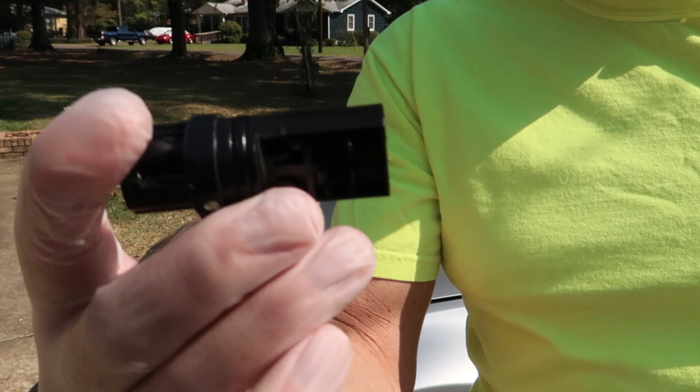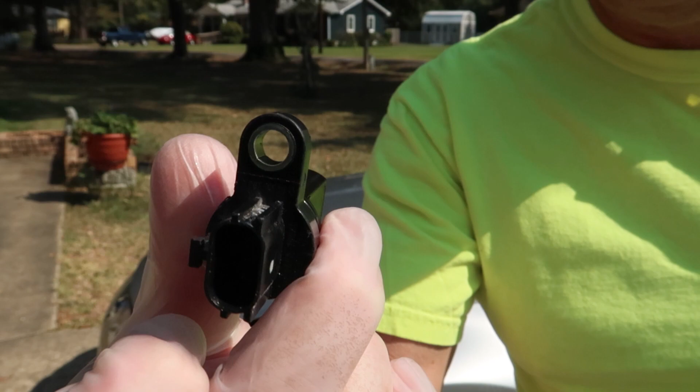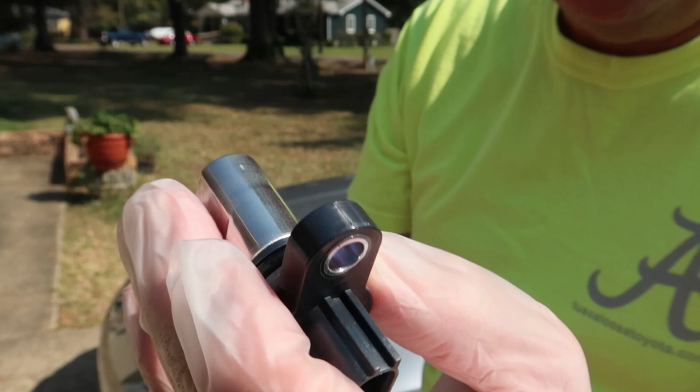It's plastic, rectangular shaped here, and it did last 15 years, so I'm pretty happy about that. No problems with this thing until this year, and now it's finally failed. And this is the new version that Nissan's come out with, and it's now made of metal. They spent a little more time and money designing this, and it's a little bit shorter, but it still has the exact same harness plug, so it's plug and play. So I decided finally to go with this one.

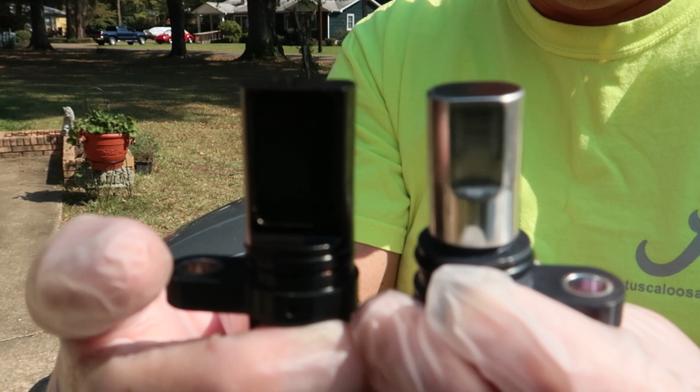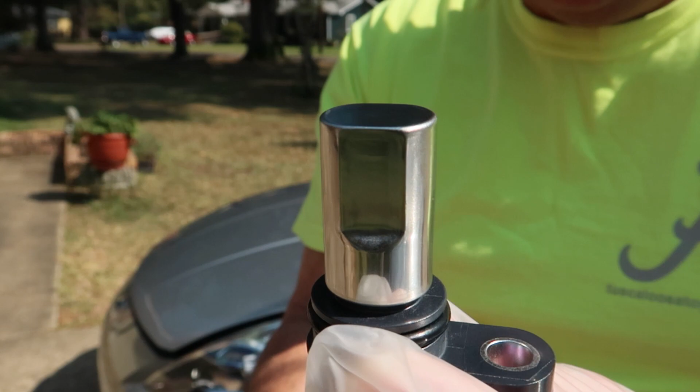It's much more expensive. It's 161 bucks versus paying like 35, 50, 75 bucks on some of these aftermarket sensors, but they're designed to last as long as the original. And these aftermarket versions, I've heard of them failing within a year of replacing them, or a few months, and people will have to go and get a new sensor even though it's under warranty. They're replacing them all the time.

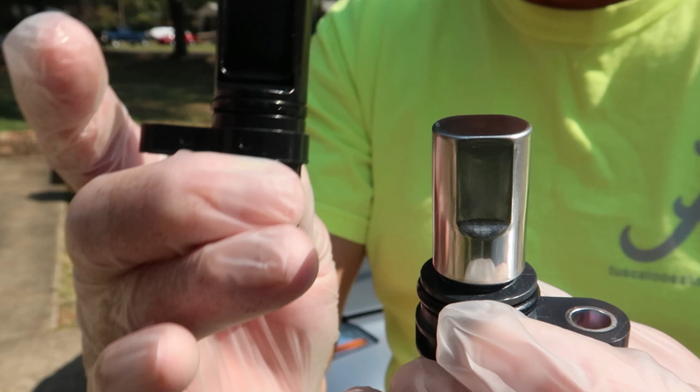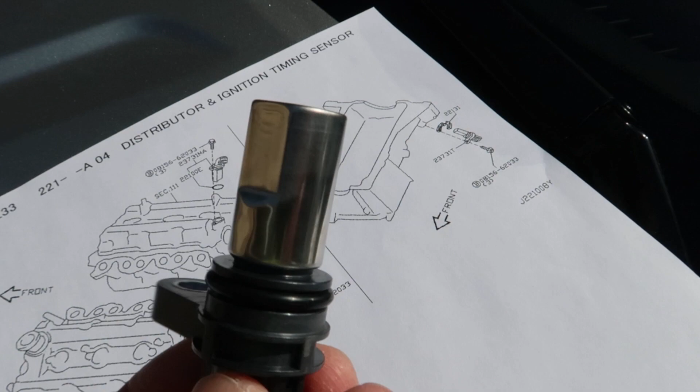I just don't think it's worth the time and effort to keep replacing an aftermarket sensor, and I would just stay with a Nissan, because these VQ engines are very sensitive when it comes to these camshaft position sensors. You really want to run a Japanese sensor in a Japanese engine, you know what I mean? So stay away from those aftermarket ones, but if you can't afford it, then you can give them a try.

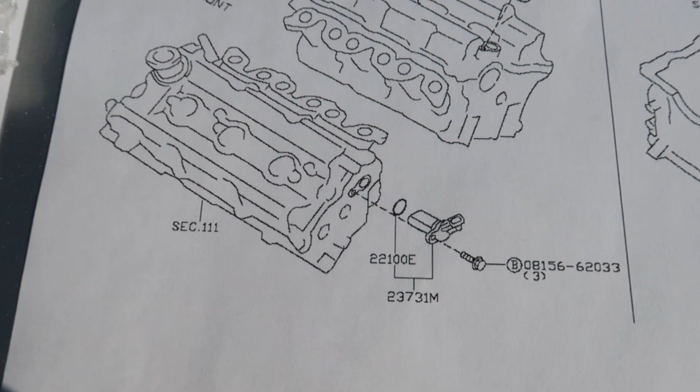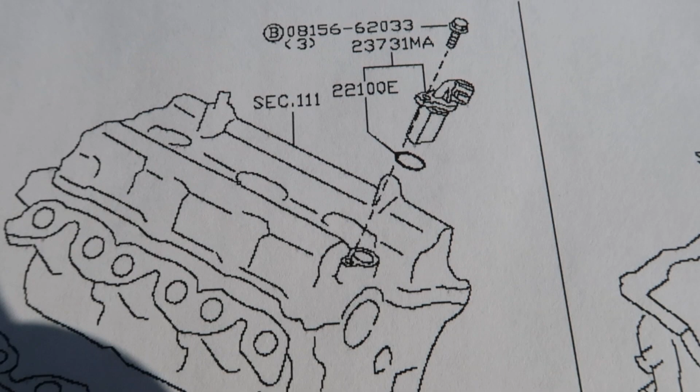Now, this is a little diagram that Nissan gave me. Just wanted to show you kind of the position of the sensors, and this is the side we'll be replacing, but here is the harder sensor to replace. This is the driver's side, and it's underneath the plenum, pretty hard to get to. You may have to remove part of your intake to get in there and visualize it, but we really won't be looking at that one today. We'll be going over the passenger side, and it doesn't slip in from the top as this diagram shows, but it kind of comes down right here in this area.

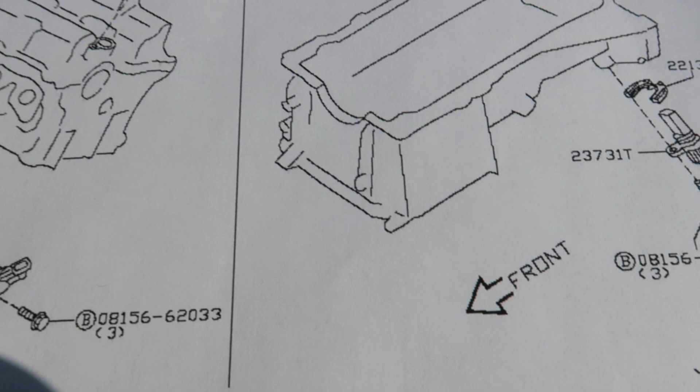Now let's go over some of the signs and symptoms that you're going to run into that'll give you a clue that it might be your camshaft position sensor. First thing is that it doesn't matter if it's automatic like this one or manual, you're still going to get these same lights going off. You got your slip, your traction control, and your service engine soon light will all three go off.

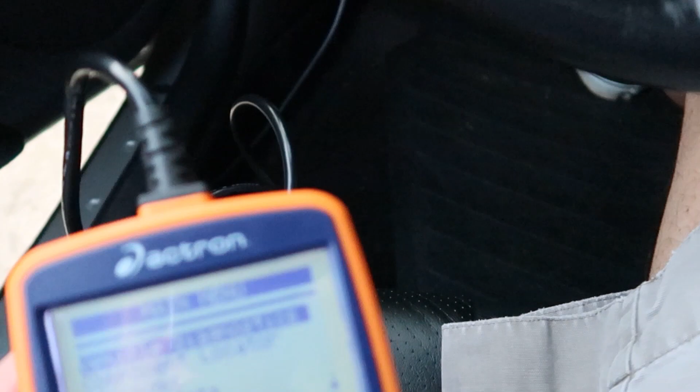We do need to figure out which sensor it is, of course, and that's where you're going to need a code reader, and I happen to have one, so I'm going to go ahead and plug that in here and see if we can determine what sensor's out, if not both. So the port is right here. It's easy to get to. I have an Actron code reader, but if you don't have one, you can go down to AutoZone, and they can also read it for free and tell you which sensor is burned out or if both are. So that's a little tip for you right there.

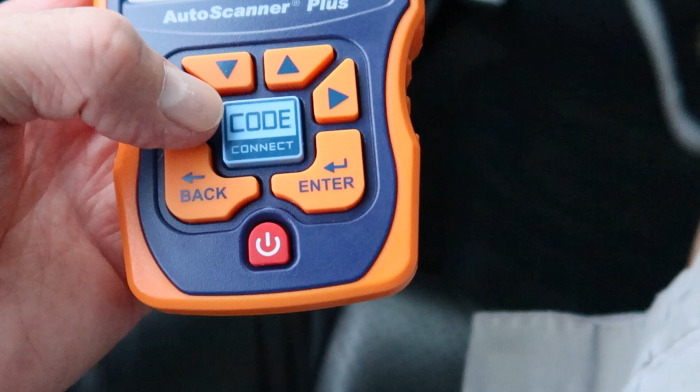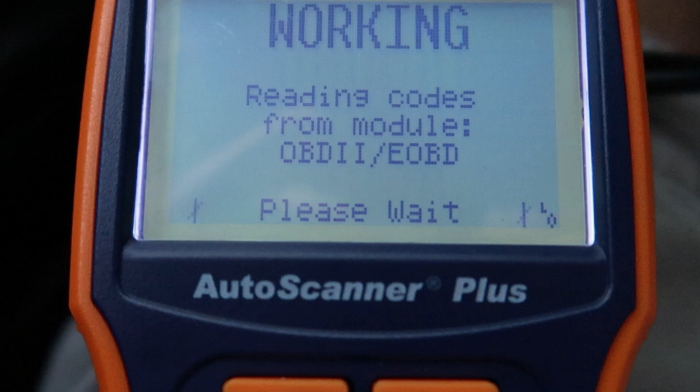Now we've got the scanner all hooked up, we can just run through the prompts. It'll pretty much tell you what to do, and all we have to do is sit back and wait and let it read all of the codes that have popped up, and then we'll kind of evaluate from there. There we go, done deal. Now we can just pan down and see what we've got here.

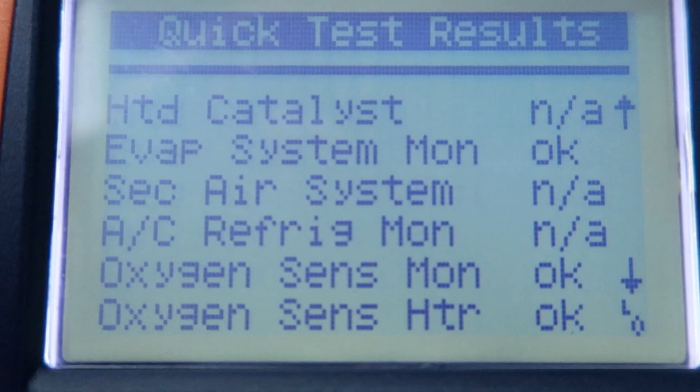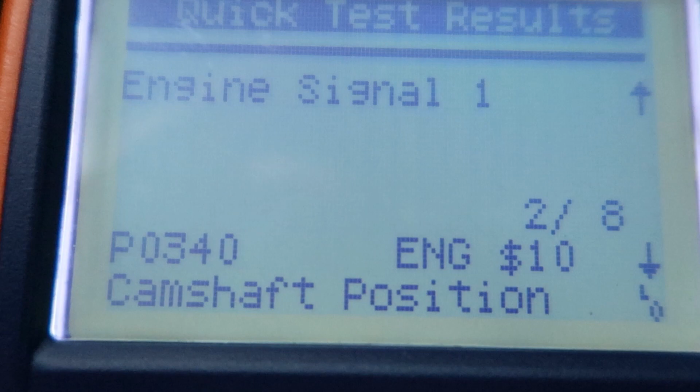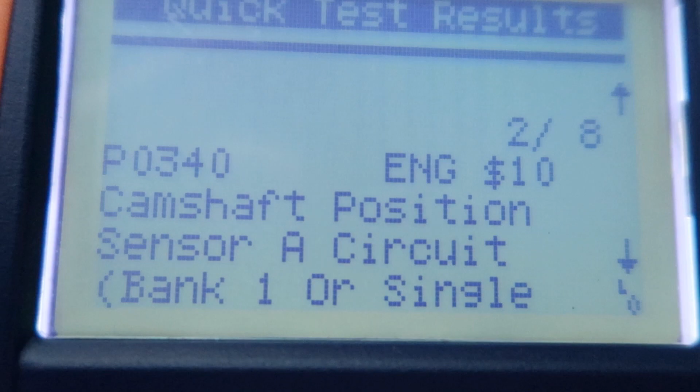So right now it looks like we've got, there it is, read codes 1130 engine signal 1, which I'm not real sure exactly what that means. I could look that up, but I'm going to just keep panning down. Here's a 0340 camshaft position sensor A, bank 1, like we thought we might have had a problem with that one. So boom, there it is. That's pretty straightforward. And then we're going to keep panning down.

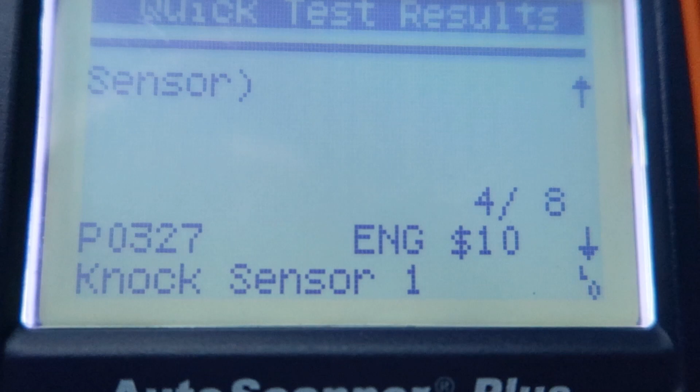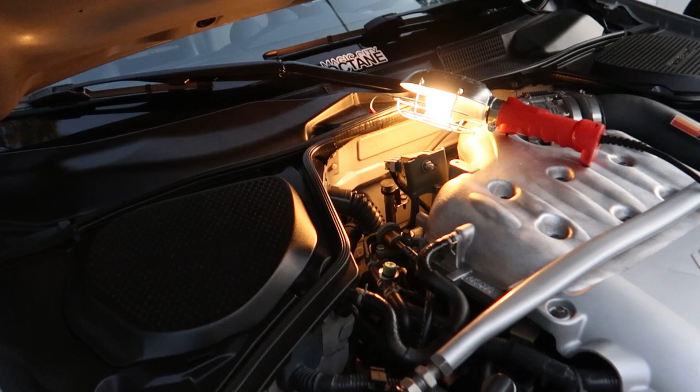We've got the same problem again. And let's see what else we've got here. We've got knock sensor, so I'm sure it's got something to do with the camshaft position sensor that's triggered that. And let's see what else. This is the last one we've got, and it's now confirmed. Bank 1, sensor A has failed. So at least we know that it's just one sensor at this point, and that's going to be a lot easier than replacing both.

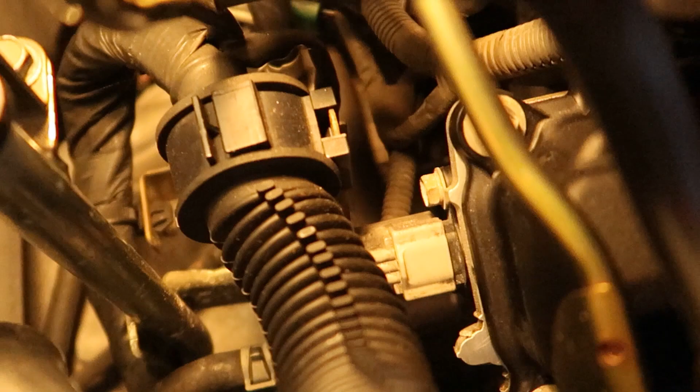So I'm going to try to show you a little visualization here of where exactly sensor A is. And you can see there is the gray little coupling or the wire harness right there, and you can see that 10 mil bolt, and that's all that's holding this thing in. So that's the good news. It's just one 10 mil bolt. Unbolt that and slide the camshaft position sensor out, and then we'll try to get it loose. And back in there, hidden way down there, is the other sensor, and we're not going to worry about that right now.

So I did actually try to get an aftermarket sensor to work in here, and that was a no-go. Like I talked about earlier, this is the one I got right here from A1 Auto Parts, but they gave me a full refund. That was very nice of them, because I told them it did not work. Here's the other sensor, and it's got a little different configuration here, but we're not going to be installing that at all. But now we're going to go over here and try to get this sensor A in.

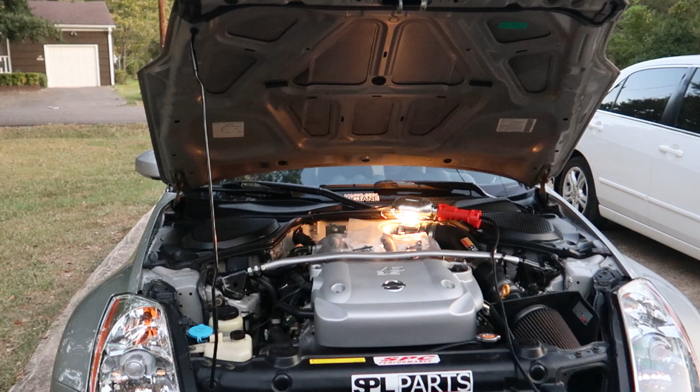So I've got a great little tip for you before you even get started. If we could get this part of the electrical harness removed from this clip right here and pull it up, it'll be a lot easier to access that camshaft position sensor. So what I've got here is a large flathead screwdriver, and basically the action is to push down on this little clip and kind of turn it at the same time. Now I've had a little trouble getting it loose, but it's really actually not that hard. I make it look a little harder than it really is right here.

But you just push down, and I thought I had it unclasped right here, but no. I had to push it a little bit more to get it to completely disconnect, and you can see right here, almost got it, and bingo, right there. That's all you have to do, and you can see it's unattached now.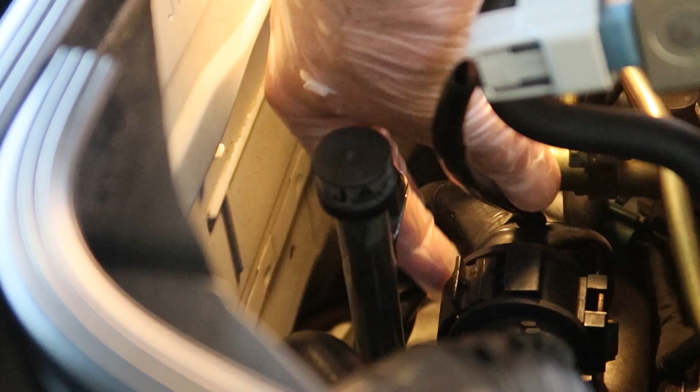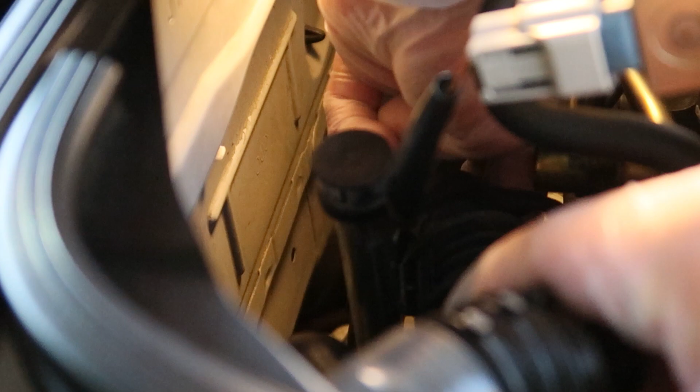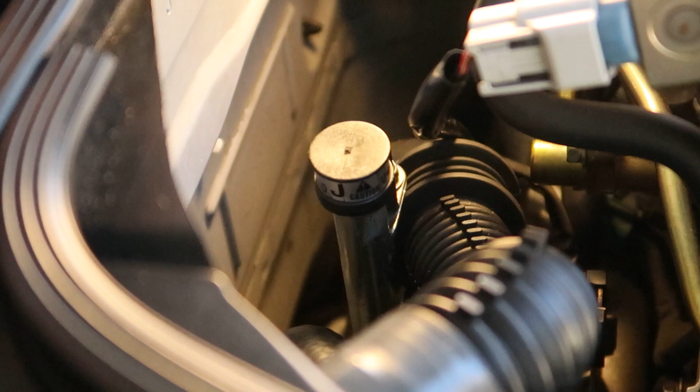Now I can gently grab this electrical harness, and what I'm going to do is kind of pull it straight up, and I'm going to go real slow and easy because we surely don't want to damage this harness. So just take your time; pull it straight up is what you really want to do, and that'll give us really good access to that camshaft position sensor. That's all you have to do. Just come up just a little bit, and it really gives us a lot better access at this point.

Now we've got this electrical harness pulled up, we can come underneath it with a 10 mil socket and a little extension. You can get right in here and crack this little 10 mil bolt loose. Or you can actually come in this angle right here with the open end 10 mil wrench and break it loose. And that's actually what I did. It was just a little easier for me to go that route. But either way will work.

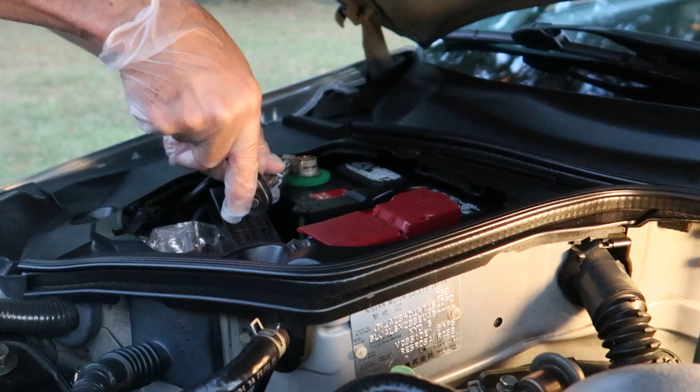But before I disconnect that sensor, I want to go ahead and disconnect my negative battery cable here. When you're dealing with the electrical system, you really do not want to have your battery connected. You want the ECU to be in the dark, so to speak, and not be able to see what you're doing. As far as disconnecting sensors and plugging sensors in, you want to do it all after the battery has been disconnected. So I'm just going to tuck that away, and we're ready to go ahead and pull that camshaft position sensor out now, and we can work on disconnecting it.

So it was a little hard to film, so I'm gonna wait till after the fact, but I've actually taken the bolt out by hand. Be careful not to lose that 10 mil bolt down there in your transmission area. But then I just slid the sensor out, and I've laid it here. We're not going to separate the sensor from this harness yet, because I've got a better position that you can put it into before you can separate the two.

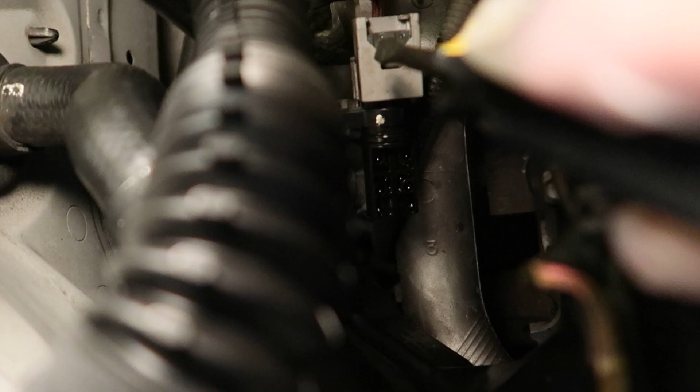But I wanted to show you that little dark gray tab. You can see that there's a light gray harness right here, and then you see that dark gray little tab. I'm gonna point to it right here. That has to be pushed forward, and this is the actual position that you want it in before you release the sensor from that harness. It's pushed forward right here.

And if you've had your sensor in there for quite a while, like this one's been in for 15 years, it may be kind of baked in there, and I had a little trouble separating the two. I had to actually put a screwdriver between the sensor and this harness. Of course, you don't want to damage your harness at all, so be very careful. But this tab has to be pushed forward or it will not separate.

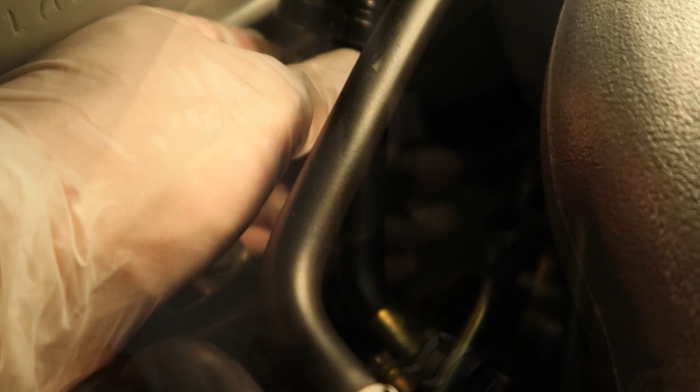So an easier way to separate the sensor from that little plug is to just take that whole setup and thread it underneath that harness that we moved up earlier, and then come up here next to the firewall, and then you can get a little more slack, and then you'll be able to get both your hands on the sensor and the plug and manipulate it a little easier.

Now you can see that I've kind of semi-separated already, but just make sure, like I talked about earlier, that this plug is pushed forward. That little gray tab is pushed all the way forward or it will not separate. And what I had to do is get a flathead screwdriver between the two. Once I've pushed this forward, I put a flathead between the two and kind of popped it loose.

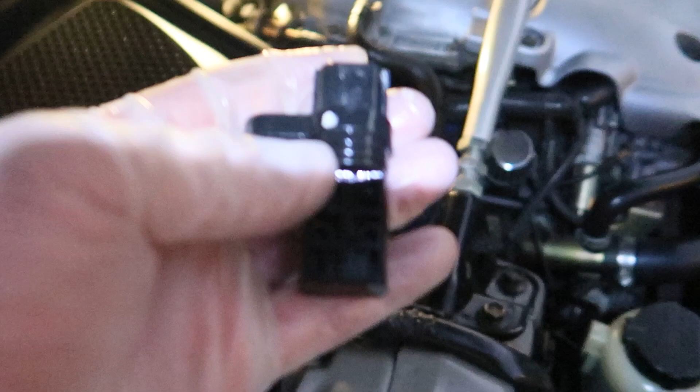And I took my sweet time doing it because I didn't want to damage that harness, and it was literally baked on there like I talked about earlier. So if you've never changed it before, take your time. Do not damage that little harness because you don't want to have to replace that. But yeah, once you finally get it separated, then we're just going to plug the new one right back in.

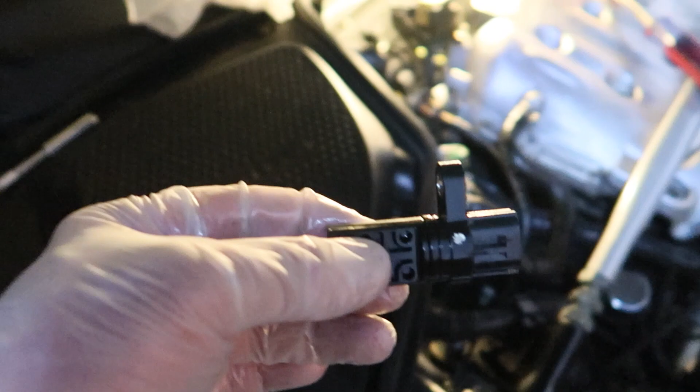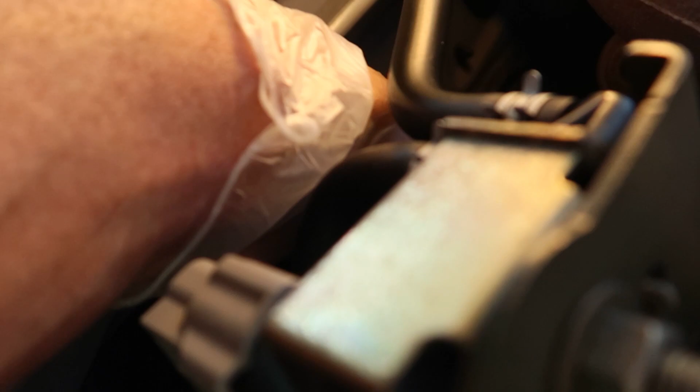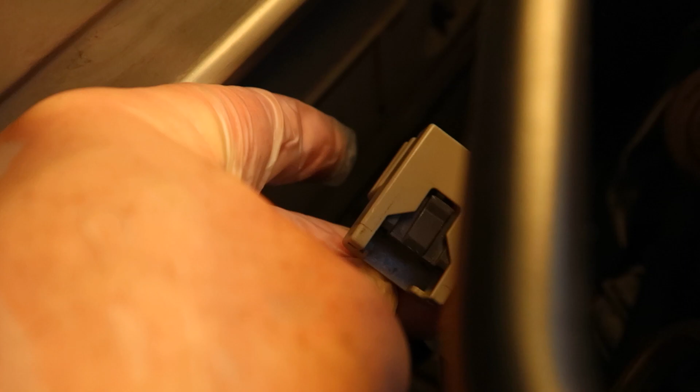Now I just want to show you a quick little thing that I found out completely by accident with this little plug here. Now I told you that I had an aftermarket camshaft position sensor that didn't work correctly, so I came back in here after I tried it and I had to replace it with the new OEM sensor from Nissan.

But I popped it into this open position here before I went to replace it, and then I got a flathead screwdriver and I just kind of pushed forward a little further just to see what would happen, and it actually ejected my sensor. So I guess it's supposed to eject it if you push a little further. Once you get it in the open position, just take a big flathead screwdriver and push forward just a little more, and it will actually eject it.

Now, I doubt it'll work if your sensor's baked in there for 10 or 15 years. It probably won't work, but if you've recently replaced it, try that method. Just push in after it's in the open position, and it should eject your camshaft position sensor for you.

Okay, now that we've got the sensor back in, don't forget to buckle down your little electrical harness here and make sure you put plenty of torque on your camshaft position sensor. Obviously it's made of plastic, so you don't want to break it, but make sure that it's nice and tight. We do not want that camshaft position sensor coming loose on you while you're driving around.

Okay, it's a moment of truth. We got the camshaft position sensor in. Let's give her a crank.